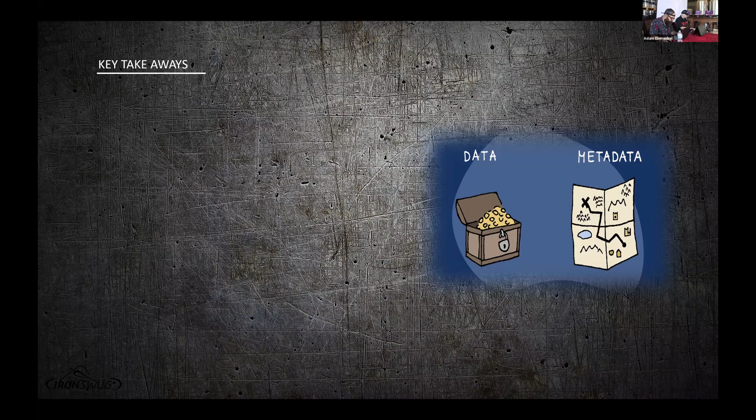But some key takeaways are just going to be streamlining your workflow, right? Automate those property inputs and reduce repetitive tasks and things like that. Also being able to standardize your data, ensure consistency across parts, assemblies, and drawings. Does anybody in here ever go looking for a part, and the part you're looking for, you eventually find it and it has nothing to do with the description you thought it should be? Yeah, that's a little troubleshooting sometimes, right, trying to figure that stuff out. So this is going to help with that. And also being able to work smarter and not harder - build it once, reuse it everywhere, be faster and cleaner and get better results.

And then if you look at this little picture here with the treasure chest and the map, you see the data versus metadata. Now keep that image in mind - on the next slide at the end of it, I'll elaborate on that just a little bit more. Let me back up real quick. There we go. Yeah, streamline your workflow, standardize your data, work smarter, not harder. There's that image - I'm just saying, keep a mental image up for just a second. In the next slide, we'll talk a little bit more about that data versus metadata, the treasure chest versus the map.

So what is metadata? Well, metadata is data that describes other data, right? A little bit of a circular reference there, but it basically tells you what the file is, who created it, and when they did it. So it can be used in a lot of different places - you can also have it used to organize, searching, automating workflows, and different things like that. It can be used in the bill of materials. It can be used for drawing title blocks. It can be used even within the PDM data cards. I'm not going too much into the PDM side of things, so I'm not going to talk a lot about that. I'm just going to stay within the SolidWorks realm of things here.

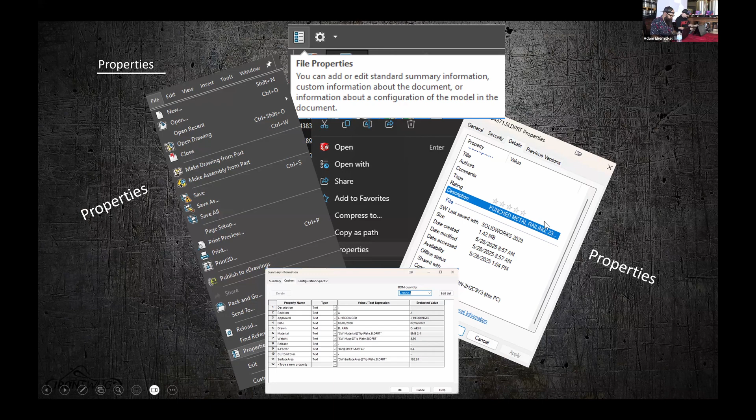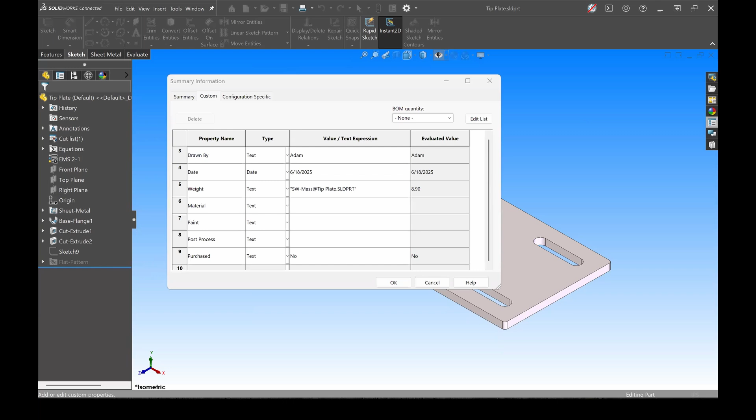Let's look at SolidWorks and just look at the properties. So we looked at it in the slide, but the one way you can get to the properties in the file, besides going to Windows Explorer, is you can hit File, come down to Properties, and here's your properties, right? Everybody, yes.

All right, so this is all this metadata in here, the file properties that live inside SolidWorks. I'm going to come down through here and actually clear this. I'm going to delete all these, just so you can see that they're clean, because we're going to come back and use this file again here in a second. So now you guys are all witness that this is clean. There's no data, nothing in there. So I'm going to go ahead and hit OK.

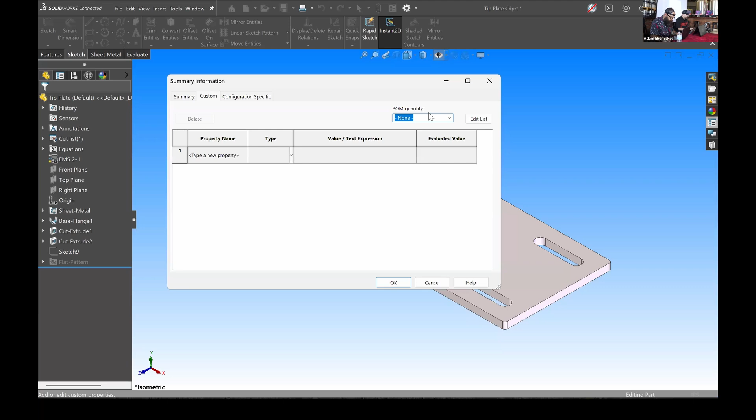And that's one way to get to it. The easiest way to get to those file properties is going to be at the top in the middle. And there they are again. We see them again, right? So we'll close that. That's important, really important. But let's jump back to SolidWorks, or to our PowerPoint again.

Jump down one slide. Wouldn't it be nice to know before you open? Does anybody in here open a SolidWorks file and sit there twiddling your thumbs for a few minutes, wondering if it's going to take a bit of time, and think I should probably go use the bathroom, call my buddy because I left my dog out, and then go grab a cup of coffee before I get back to my seat?

Be nice, right? So there's one tip.

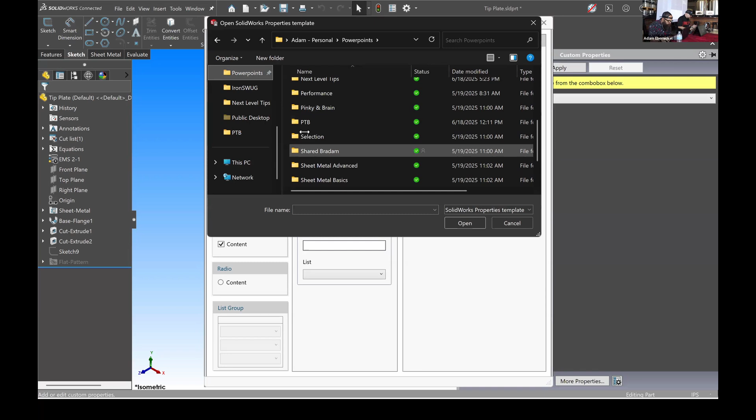This is one I just created for this presentation, just to show you what I did with it. I fleshed it out a little bit more.

I got part number, that's going to be your file name. I threw weight in here. We all need to know the weight of the drawing. Do we want somebody to have to go to the evaluate tab, get the mass every time and plug that in? I don't want to. Do you want to? So we could do that, and I selected that as a read-only option as well.

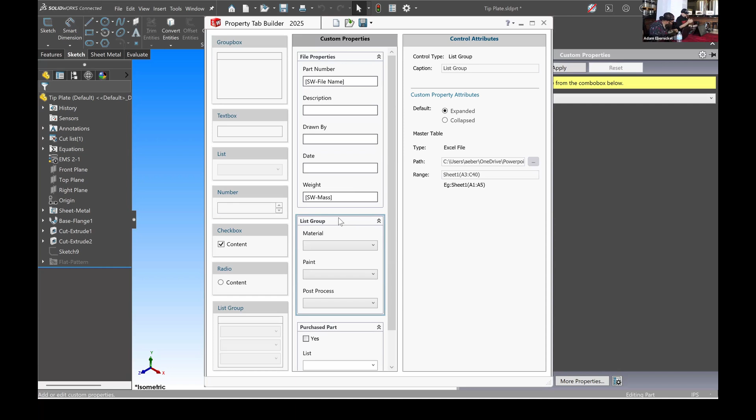I've got a list group here. I'm going to show you the Excel file that I put in there. But it's basically for material, so we can know what kind of material is there and what the process might be behind it. Also this last box, this is really cool.

Let's say you have this selection here, and I've got it listed as purchase part. The reason being is maybe we have this part that we created and we can't manufacture it. Well, if we can't manufacture it, we click the yes button. I have it defaulted for the value to come up, and they have to select yes for what to happen. It's defaulted as unchecked because most everything we're going to do, we're going to make in-house. But the minute they check that, it activates those extra options, right?

And you do that by setting up this. You say, okay, I named it purchase part. I want it to be defaulted unchecked. If they check yes, it's going to pull up this information, and the value is going to be yes and no. We come down, if yes is checked, then we have these different options.

Now I can delete this option and move it down to the no. So that way, if no is selected, that's what shows up. But I don't want that under no, I don't need anything under no. If no is selected, or is not checked, for example, then it's not going to do anything, it's just going to stay like it is. So I'm going to put that back in there.

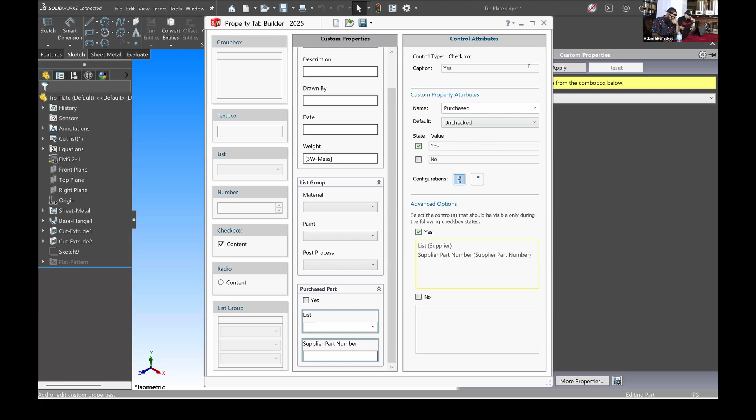I'm going to close that guy. I don't want to save it. Hello? Yes, I do want to.

Okay, alright, so we're looking at this part. We already verified, I'm going to pull this up real quick. We already verified nothing's in here. Here's the configuration specific stuff I was talking about.

I do want to mention this summary tab real quick. That's more of a file property tab, I guess you could say. When I go troubleshooting with people, this is one place I'll go.

SolidWorks does a lot of updates, a lot of feature enhancements, and they do it for our benefit because it's usually things that we're trying to get better or make work better for us. And throughout those times, sometimes the architecture of what's happening gets changed.

Give you a prime example, sheet metal in 2016 was a major architecture overhaul for SolidWorks, right? So every now and again, if I get a user that comes across with a sheet metal issue, the first thing I'll say is, okay, that looks a little funny, let's go check your graphics driver. That's going to be my first look. If the graphics driver is good, I'm going to say okay, let's go here and let's look, because we talked about this just in real quick passing a minute ago.

But I can see here on the summary tab that this was last saved on June 18th of 2025, and it was by me in SolidWorks 2025. But it was created Wednesday, February 5th, 2020, that's when the creation date was. So sometimes when I see an issue with the file, I'm seeing that it's old. I'm seeing files from 2009 that have been copied over for so long that architecture change has caused some issues with it. Sometimes you've got to go back and either redo some of those features or suppress and unsuppress them to wake SolidWorks up to this new version and say, okay, I'm alive again.

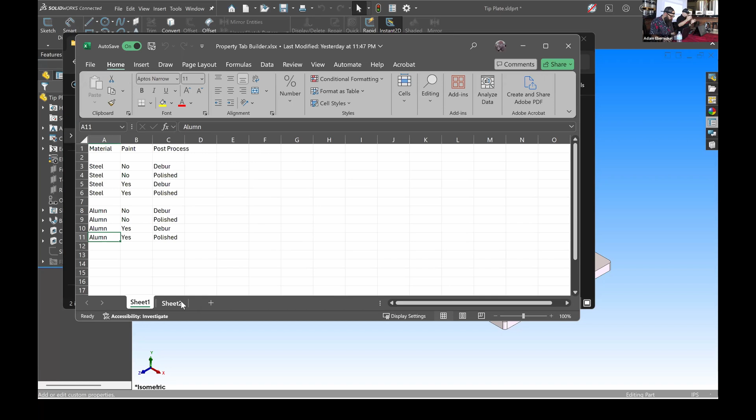And let's talk just a little bit through the spreadsheet. You can see how it's set up. You have to kind of think a few chess moves ahead, because you're trying to see, okay, what's my end goal here? I'm basically trying to illustrate the material, if it needs painted or not, and what that post process is going to look like.

If I had another process after that, I probably need to look at how many of those there are, because for each one of these processes, you're going to need an illustration of a material or whatever that first column is to be the same. Because it's going to say if you pick steel, it goes through all these different options. So if I pick steel, it eliminates aluminum options and it says, okay, now you have yes and no. Because they're the same, it sees them as the same. So then I'm picking yes and no, and then it defaults. So if I pick no, it's going to eliminate the yes stuff and just go to the post processes for no. And that's how it's going to work through.

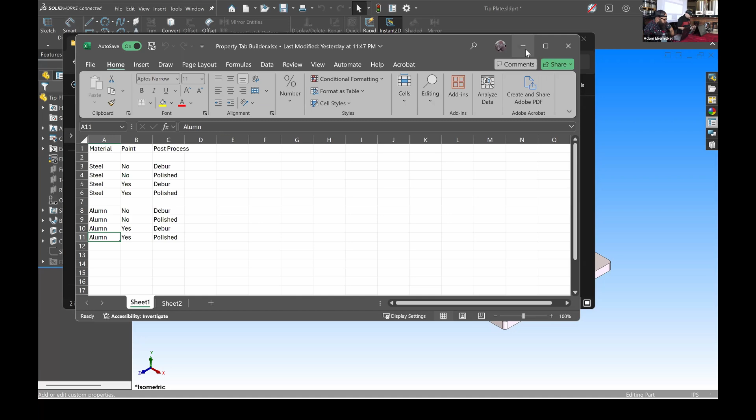We'll see that play out in a minute. I did a small preview of this for the Sinclair group. They enjoyed it as well. However, this broke on me and I didn't have time to troubleshoot it. I troubleshooted it within 5 minutes here before we started, and got it working again. I moved this data from one computer to another and the files didn't link up exactly right, but we got it good.

So we're going to minimize this down. Now we're going to look at how to use it. We're going to come in here, hit the drop down. This is the one we created. As soon as we create that and click it, it pulls that information.

So now I don't have to go into the properties. I don't have to fill the information out there. I've got the information here. We've got the part number. This is the one we said we wanted read only - we don't want them to mess with it. You look to the right, tip plate, because it's pulling the file name.

That's correct. Now we can add a description, so we'll say test. We can say drawn by AZE - we'll use my stuff for that. Should probably be using caps. Let's go down to date.

Now date, I can type that in manually if I really want to, but I don't really want to add extra mechanics to what I'm doing. So I'm just going to hit the drop down and say it's today. That's pretty nice and convenient. Then that weight that we were looking for, we don't want people typing that in either - it's living right here, so it's almost 9 pounds.

Then we can come in and select the material, whether it's steel or aluminum - we'll say steel. Then we can say if it's painted or not - we'll say no. And then we can say what process is going to happen after that - we'll say we're going to polish it. And then is it a purchase part or not? If it's a purchase part, we select yes.

And then we can go in and look at that list that we have from that. Who's it from? Do we only want to allow our people to use items from certain vendors? Well, here's your chance to do that. You can say only use stuff from Fastenal, TriMech, Go Engineer, Hawk Ridge, or McMaster-Carr. Those are who we want you to use, so don't use anybody outside of that. So we'll say that's McMaster-Carr.

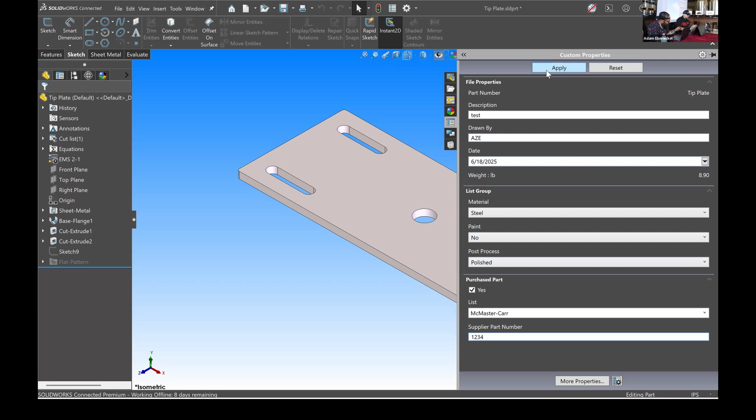Once that's done, we're going to hit apply. Once we hit apply, we can come back and we can look at that file properties again, and everything's in there - everything we wanted in there. And that's so much easier, right? So we'll close that. And that's not the end all be all. What do we do with that data now?

Well, let's make sure we're utilizing it in the right aspect and put it in our drawing.

Now, because I'm using a 3Dconnexion mouse, just a couple of cool things. If you don't know about mouse gestures, they live on your mouse, right mouse button, kind of hover, click around them. But 3Dconnexion also offers a radial menu, where you can click the button and have even more mouse gestures. That's pretty nice. You can set the buttons to do certain things. Like right now, I'm opening a print and I didn't click anything. Pretty nice, right? 3Dconnexion, go ahead.

Again, at the end, you'll have an option to win some of that stuff. But in here, at the bottom in the title block, I've emptied all this out, so there's nothing in here. Some people will still go in and fill that out manually with text. I advise not to do that because it's more room for error.

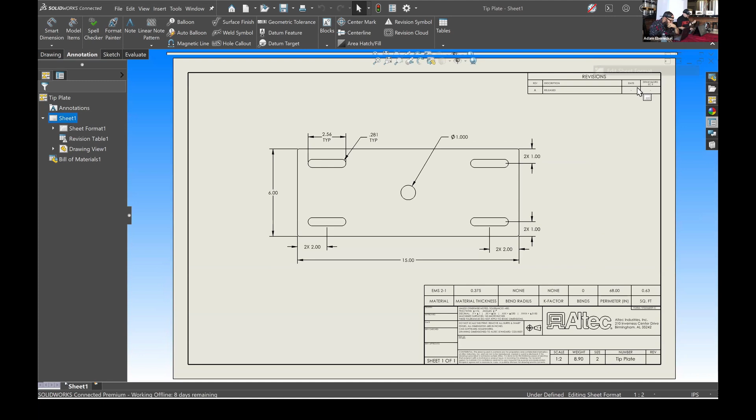But you can go in just like you do when you make your drawing templates and right-click, edit sheet. Come in here. Usually there will be a text box if you're using some out-of-the-box stuff. But if there's not, it's fine, you did your own thing. You can just hit note, grab a note, stick it there. Say enter, or don't say enter, just click off. There it goes, it's living there. I can drag that, put it where I want to.

So let's say I'm going to drag it. I'm going to do drawn, right? Drag it right down here into that title block. Then once I drag it, the title block is still selected, so I can come over here and do link properties. Linking properties has a couple of features in here.

Right now it's select a current document, so that means it's going to pull whatever file property metadata is from the drawing. Some people like to use that for maybe a check-by or any of those kinds of aspects, they might do that in the drawing. I like to do everything from the model myself because in the future, I feel like MBD is going to be a good thing because the model is master and you don't have to have drawings duplicating data that causes issues. Just a small brain thing of mine.

So that's for drawing, but you can click here and do model found here. If you do model found here, you've got two different options to select: drawing view specified in sheet properties. We'll talk about that and get a little more in detail with that in a second.

The next one's going to be selected component or other drawing views, so you can select maybe another drawing view or whatever. I like to live here, with the specified sheet properties, because I can go in and manage it a little bit better. I feel like it's easier to work with.

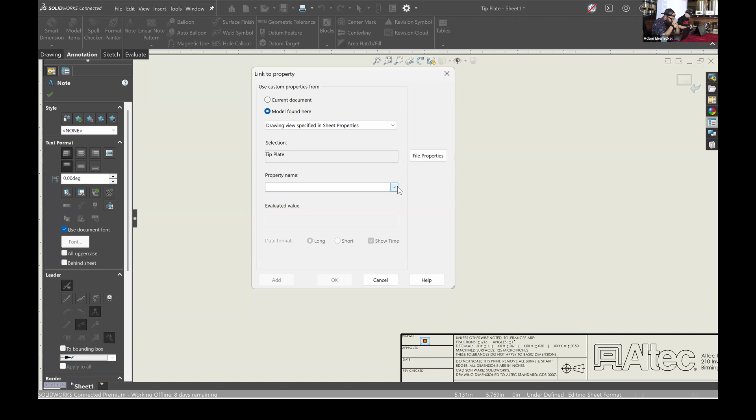Now we're going to go in and do drawn by, right? And we're going to say okay. And my name automatically appears. It's magic, right? So I did all that information over in the model, and now it can automatically populate in my print once I do this. And if you use print templates or drawing templates, you set this up in the background and it always works. You don't have to go in and do this anymore. It's just a little bit of pain up front to last forever and create a lot of good, repetitive, clean data.

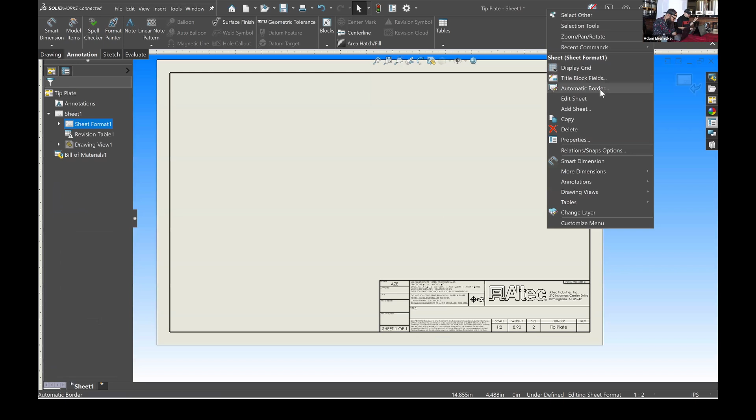Okay, so just out of curiosity, what happens to prove that we did that? Now, when we want to come out of this, we do have to right click and go back to edit sheet to come back to the sheet. But we see we're out of that, we're not modifying it anymore. If I go back, let's go here, go back to my part.

We'll go to file properties and change it from here. We'll look for my name, and instead of my initials, maybe I really meant that to be my full name or my first name, not my initials. So I'll change that to Adam.

Oh yeah, let's do Bradham. Bradham, I like that, let's go with Bradham. Good job, thank you, Brad.

There's Bradham, and we did that. We fixed it. Now let's go back to our drawing and see if it updated. Well, of course it did. It updated like magic, right? We didn't have to go back and fix it there.

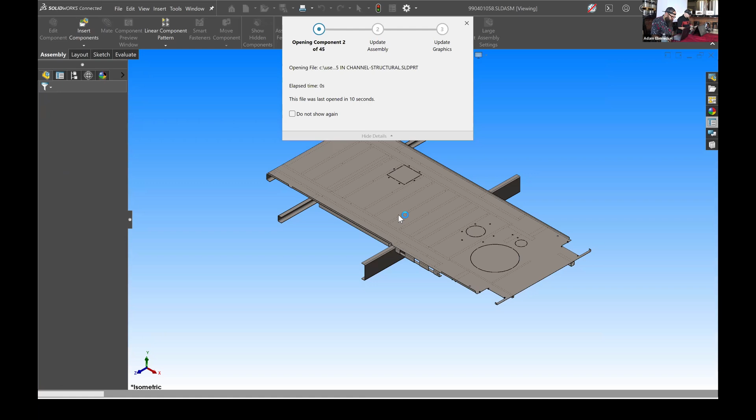It populates that metadata through all of our documents, so we're not worried about repetitive or redundant tasks. Once we get there, we're looking at this, but remember we talked about how to change those views or whatever we wanted to with the file properties. So let's grab another part real quick. Let's open this for just a second.

All right, so here's this other part. I'm gonna bring this into my file. Come over here. Nope, sorry. Here, there we go, this is right. Grab this. Well, let's refresh. It might crash on me. This happened earlier.

You blow it up, it's not a SOLIDWORKS presentation without at least one crash, right? It locks up right here. What it did is because I had this file open earlier, it was thinking that was still there. But for whatever reason it kind of locks up. Yeah, you broke it. Yeah, I broke it.

In the interest of saving time, I'm not going to go into that since that was the last thing I was going to show live. Basically, what you do is bring another file, you got a different view.

You're going to right click and go to your drawing properties. So right click, go to properties. At the bottom of that properties window is a drop down that will let you select default or whichever view you want. When you select that view and hit OK...

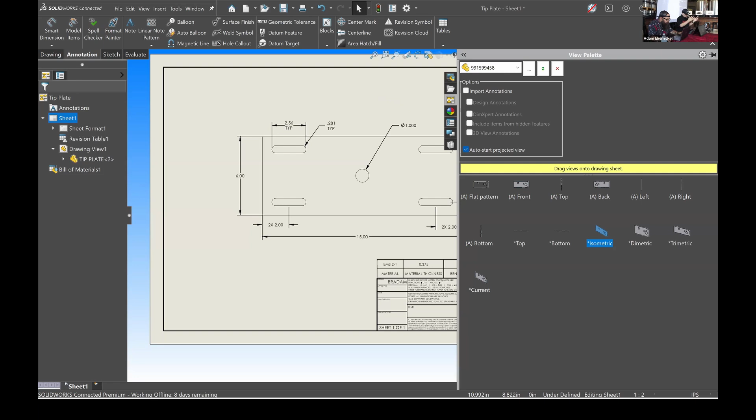Let's see if I can crash this real quick. It's going to change what's going into your link properties, right? Sorry I wasn't able to do that last one, but for sake of time we'll move on. That was the last thing I was going to illustrate live. Let's jump into our PowerPoint real quick.

One thing I like to do towards the end of my presentations is give out some notes, like if I was you and you were me giving the presentation, I was trying to write some stuff down, what would I have written down? One of those is that metadata is info. If I didn't know what metadata was, that's the first thing I'm writing down, that it's basically just information about whatever the file is.

Info before opening a part. It's nice to know that I can get that information before I even open it. And why that's so important, as I pointed out before, is because what if you got a part that's going to take 10 minutes to open, right? Not for the sake that I need to go use the bathroom, but for the sake of, do I really want to open it fully resolved? Do I want to open it lightweight, or do I want to open it in LDR? Hopefully people in here know what LDR is.

Large design review, it'll take a model that opens in 10 minutes down to about 30 seconds to a minute, right? It cuts out a lot of functionality. It's basically giving you a silhouette and not giving you any of that real data about the information in those files. It's just a pretty silhouette, that's all it is.

But then from that point, after you've opened it in 30 seconds to a minute, you can do a selective open. I like to use volume select for myself, to select a certain area, select the files that I want, and then do that selective open. It will render those and fully resolve just that information, saving me a 10-minute open down to maybe a 2-minute open for just a little bit of stuff I needed to modify.

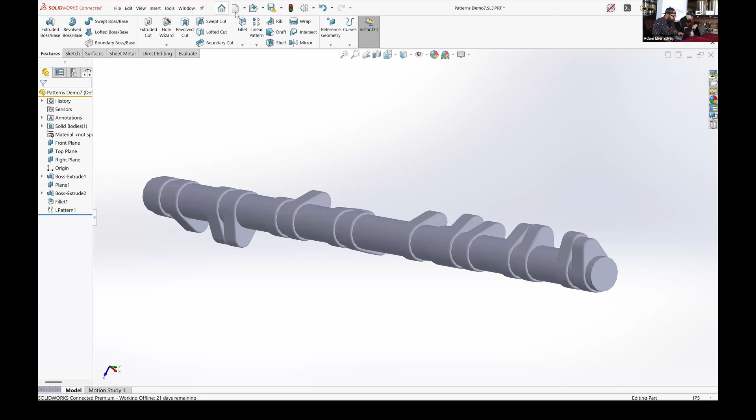So we'll start with a new part here, because all new parts start with a sketch. See, we're in kind of a front plane, it's kind of facing us. Auto flips to us in dimensions.

We'll go to our settings here, go into our sketches, and we'll show all the stuff I have set up here. We can turn them on and off. I'm going to use fully defined sketches, I'm going to turn that on, force myself to play nice.

How many people have ever heard the Toby Schnaars song, Fully Defined All the Time? Okay, there's not enough people that need to hear this. Do I need to play it for the next 5 minutes?

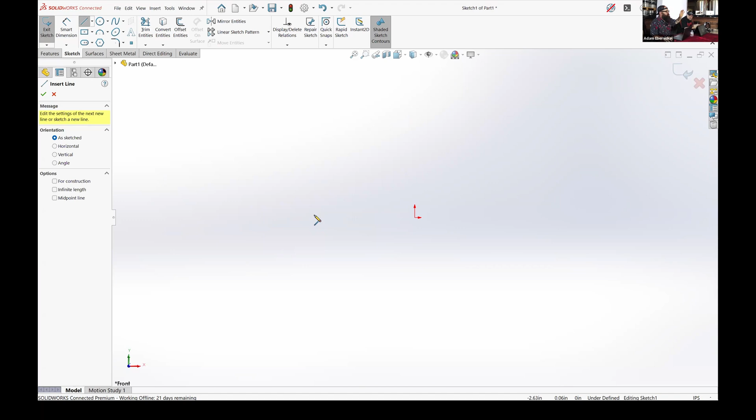I encourage you to go find that on YouTube and watch it because it's an earworm. It'll get stuck there, and then you'll be singing it in your office, and your coworkers will hate you.

So, alright, I've got my box here. I can come in and initiate a dimension if I'd like, but with the preview dimension sketch selection, I can click on the dimension that shows up, type in what I want, hit enter, escape, click on my next one. The dimension is previewed there, kind of shows you what you're trying to do.

But we're going to delete that one out. I'm going to try to exit out of the sketch. Another little tip: hit the D key, bring that exit sketch feature right to your mouse button, and now it won't let me get out of there because there's parts moving.

So if you have users who love to leave dimensions undefined or underdefined, force them into playing nice. If you're a CAD admin, force all your users into this. It'll drive them crazy for about a week until they learn to play nice. And then we can move on with actually creating the rest of our parts.

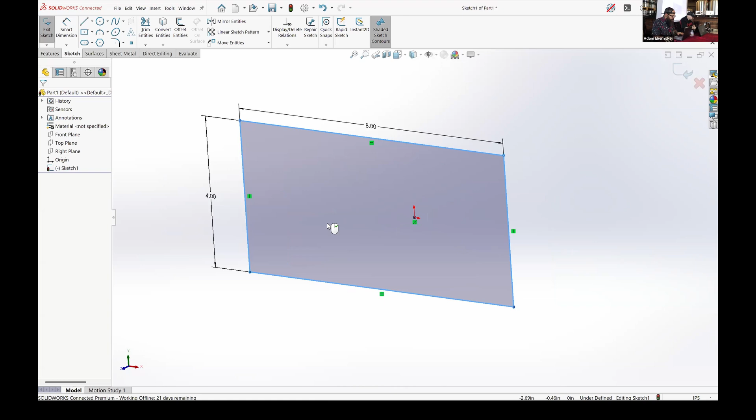I can actually move this around by selecting—if I undefine the centers here, I can grab inside that area and move all the dimensions around if I'd like, but we don't want that right now. So we're going to Control Z back, because Control Z is my favorite command ever.

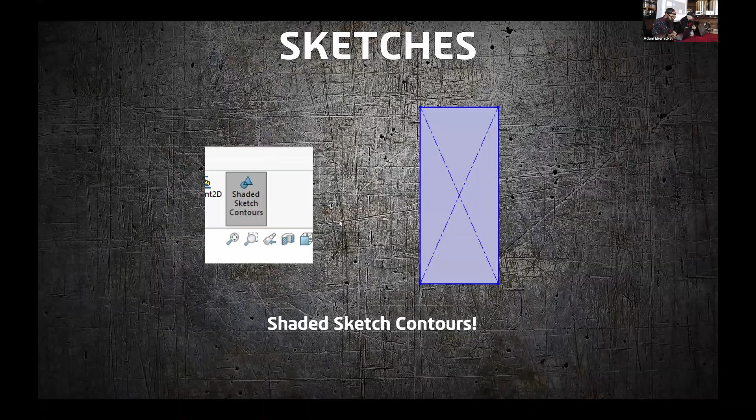Use the D key to bring that back, exit my sketch, jump back over. Alright, go to dynamic mirror and some dimensions here. So now I've got a plate. I want to do a cutout, but I want it symmetrical.

At Altec, we love doing parts symmetrical because you never know if somebody's going to bend it correctly or if it's going to be put on backwards or whatever.

But we're going to create a center line here, fully defined center line. I'm going to click on this center line, hit my S key. Another tip and trick: the S key brings up your shortcuts bar, which also has a function search in it. And I'm going to turn on my dynamic mirror.

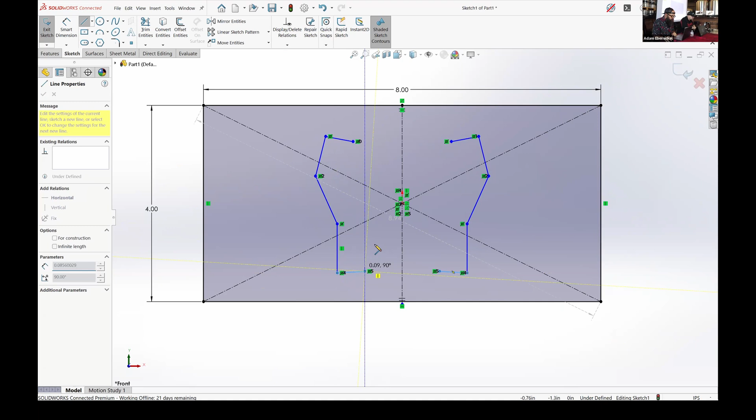Now, I'm not sure if you can see that very well on the screen, but there's a double line at the top and bottom, indicating that we have our dynamic mirror on. So now I can come in and start drawing my lines of the shape I want to create across my part, and it'll continually mirror those parts over. So as long as I keep that command on, it'll keep doing the mirror function, letting me continue modeling it symmetrically with only having to draw half.

Now there's a caveat: if I delete one, it doesn't delete the other—maybe a feature enhancement we'll try. If I hit our trim command and trim another thing out of it, it doesn't go back. So it only really works on sketch item creation. So if you know you're going to be working in symmetry, doing some revolves or whatever, you can do that.

We can work with the dynamic mirror. Now to take it off and get out of there, we go back into our S key again, go to our command search at the bottom, type in dynamic mirror, and I want to show where that's at. I can come over here and poke the eyeball.

It's going to pull up a bunch of things, show me where it is, and point to it with an arrow. If I want to go navigate to that, I don't necessarily want that—maybe I want to put it on my shortcut bar. With SOLIDWORKS 2024 and up, you have this little plus key there, and it adds it directly to there, so I can go back in and find it again without having to go search for it.

As you can see, the double lines are off. This is a sticky button, so we can turn that off. Well, now that I've got my stuff, we've got to fully define my sketch. So we're going to come in here and throw some dimensions in.

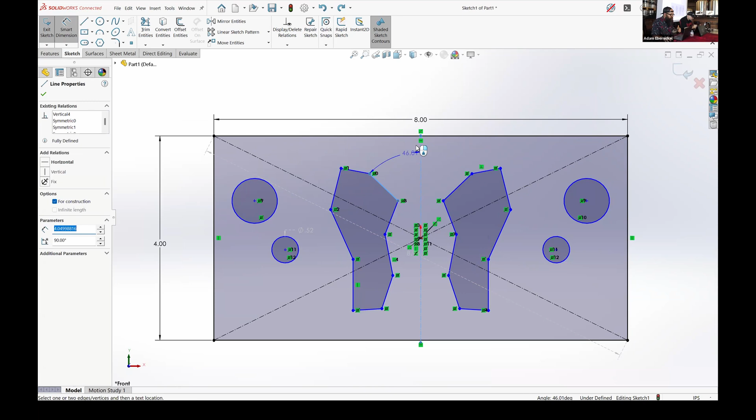You're not going to measure from the center line on this part. You're going to measure from edge to edge. So you pull it up, hit your shift key, drag it over the center, and now you've got a full dimension across both those pieces, both those lines.

We'll show it again real quick to show how easy it is. Hit your shift key, drag it over the center, and now you've got a full width dimension with only having to click over the center line. SOLIDWORKS is smart enough to infer that this center line is just there for reference, and I only want to dimension the actual hard entities.

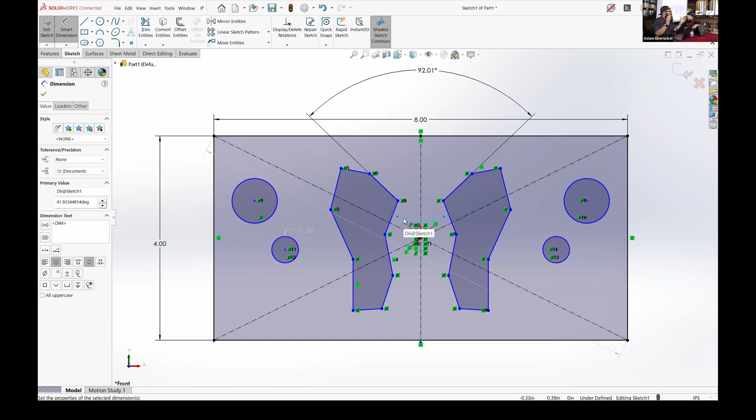I've got a user who loves to draw a bunch of lines and trim everything back out. One tip I like: notice how clicking makes it stick to the mouse. If I want to end it, I hit escape, or if I want to leave the line command on, I hold the left mouse button down while dragging my last line, let go, and it disconnects from the actual line chain.

We'll do that again, a single line. You hold the left mouse button down, and it'll allow you to do individual lines one at a time, rather than clicking and having the chain happen.

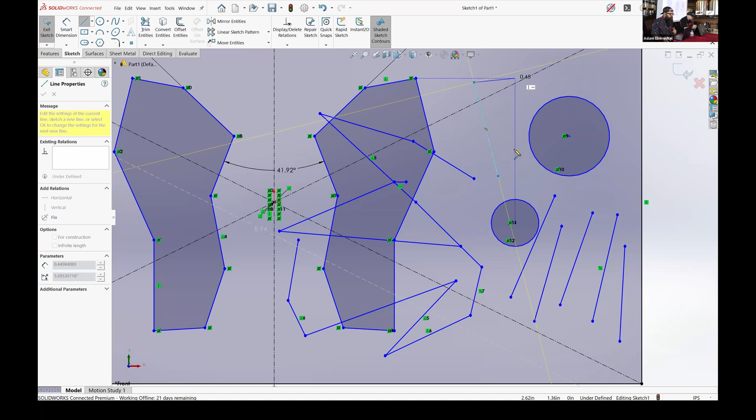Now that I've got all these lines in here, I need to figure out what to do with them. So we're going to initiate my trim command. I love power trim. It allows me to go through, click the left mouse button, draw my lines... oh, I went back over it. Let's go back over this line. There it goes.

This screen is too sensitive. I think it works a lot better when you're not on a 2K monitor. Pixels are a little... yes, it does.

But if you're doing power trim and you know you want to extend something, you can hit your shift key on that power trim, and now everything power trim becomes power extend. As He-Man says, I have the power, I now have the power to extend.

Now I can continue with that as well by clicking the line I want to extend. Say if this one here, I want to extend that line. I can click, hold the shift key, and just drag it straight out. It'll keep me from having the line move left to right, up and down. It will just extend it to wherever I want.

We'll do that again. Pretty simple: click your shift key and just drag out. We can click, drag out, and that gives you your shift power extend, and another snippet of extend there.

Because I have users who are terrible at modeling, I won't give them this hint, but I'll give it to you. If we have a bunch of swoopy stuff like splines, we'll go ahead and delete a bunch of this out of here.

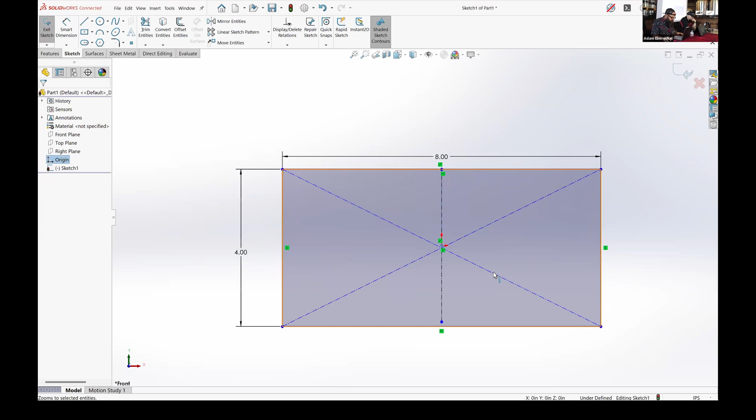All right, we're going to throw some splines in, but I'm going to do style splines because it actually helps me out. So I've got a spline here. Kind of hard to dimension that spline, but I can dimension the control points.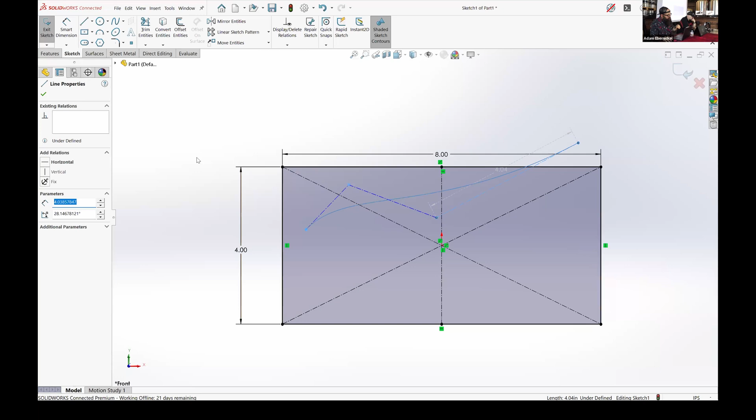Instead of taking the time to dimension the control points, I can right click and go to Fully Define Sketch. This is only if your users are already doing fully defined sketches. If you're not, this is kind of a dangerous tool. It'll auto dimension your parts and put the relations in for you. So a little bit dangerous if you're new at it, but just a tip to get you out of there quick.

Also, got some lines here. You want to go back over your line, and now you've got your arc from your line command without actually having to go and initiate an arc or a circle. You just go back over your start point and go from there.

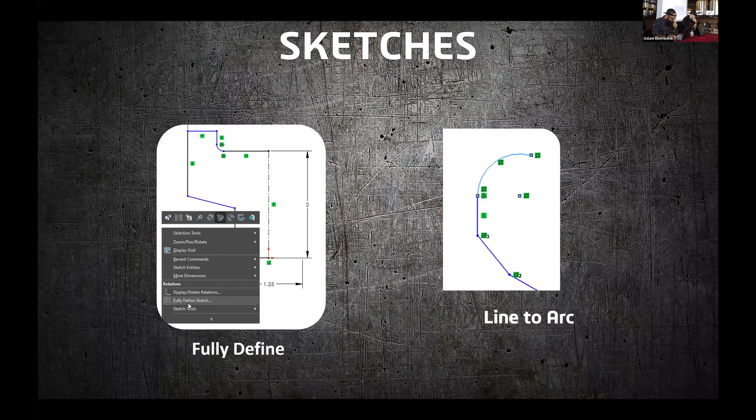We'll skip through here a little bit to give us some more time. Now that we've got our sketch tips and tricks out of the way, we'll go over to parts.

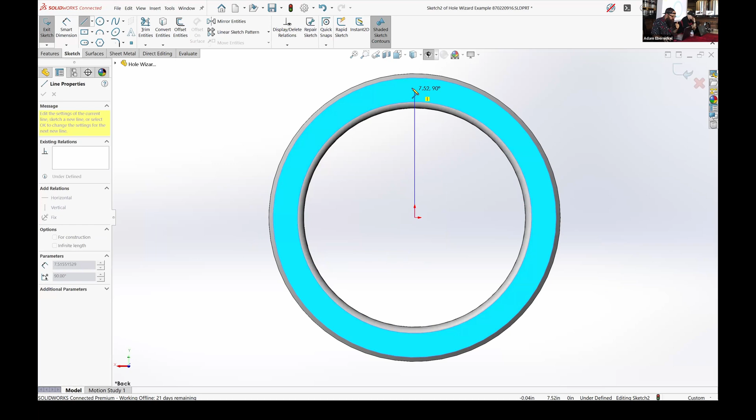A new feature in 2025 is using the hole wizard but basing it on a previously created sketch. So we'll open up here. We'll draw a sketch, delete this one out just to give us a fresh canvas, draw our sketch here, draw some radial lines because we want to make sure our holes are in the right spots, then dimension it.

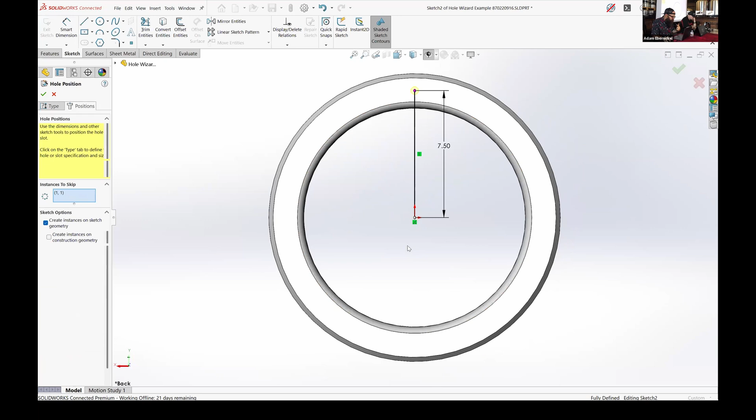And now we can initiate our hole wizard command with that sketch activated. It already picks automatically the endpoints of your sketch, but you can also go through and say, I don't want that one at the bottom. You can skip it. Finish your sketch, it's now absorbed into your feature.

Now, along that line, while we're in here, we'll go ahead and do our pattern, some pattern options here. Make sure we have some time for everybody to play on those machines. We'll initiate a circular pattern.

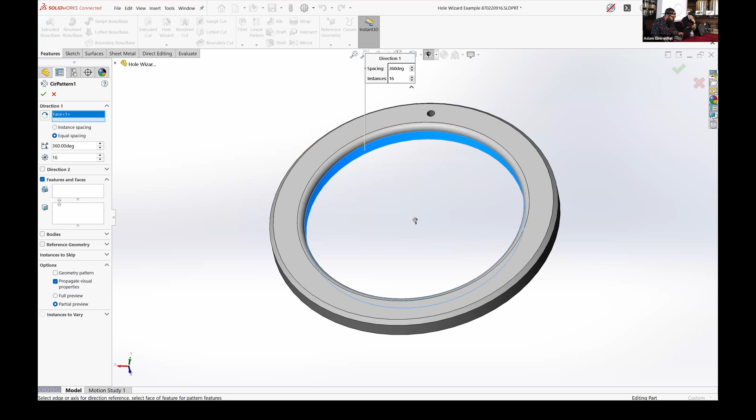Going to bolt this thing down. Got lots of holes in there, but I found that in the assembly, this hole specifically has an interference. There's something that's hovering over it. I can't put the bolt in the hole. Well, I can come in, edit my feature itself, go to instances to vary at the bottom.

There's a little key at the bottom you can put. Select the one you want to vary, modify the instance, and then change your dimension to, let's say, 70 degrees, and move that one, shift it either way to make sure that wherever you have this instance actually plays nice with your overall assembly. So we'll kind of throw it out there this way.

You can do this with assemblies as well as parts. So assembly features, linear patterns, allow instances to skip, instances to vary. We can go through that as well. I actually have a really good one here.

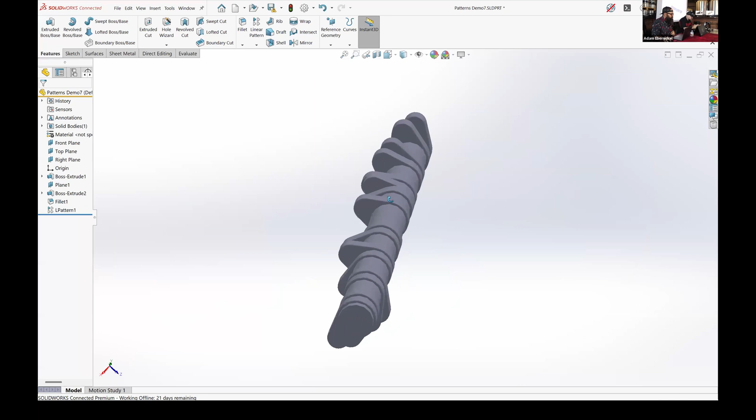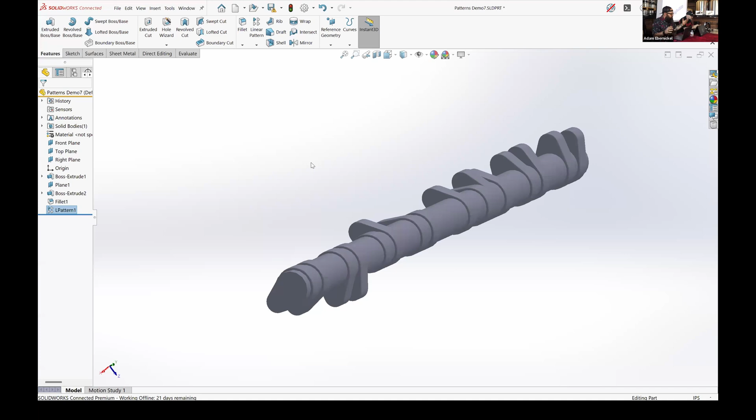Camshaft. I've actually made one pattern to make all the cam lobes, and they're all in different angles and different spacing. So instead of having multiple patterns to get the cam lobes in the right way, I've got my linear pattern with modified instances, modifying each of the lobes plus or minus a few degrees to make sure I get the lobes at the right separation angle. So when you're in there doing patterns, play around with the options. Make sure you get ahead of the curve and just try some new things inside your part patterns.

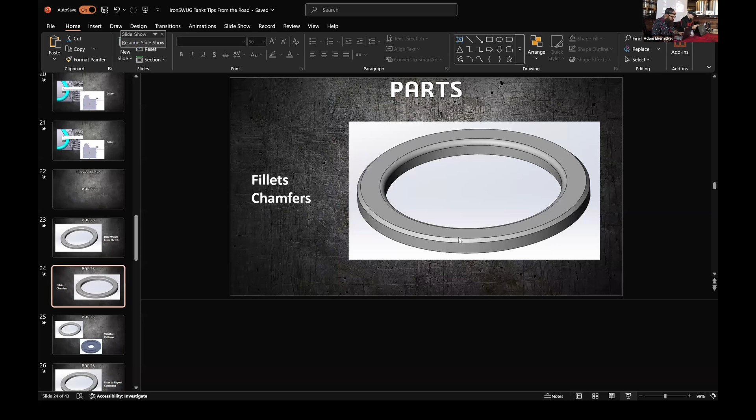All right, so we'll jump back into our chamfer example. Now, I'm making this part, this one doesn't have holes in it, but my machine shop says, I don't like this radius on here, I want a chamfer instead. The radius is just too hard to machine, or it's too time consuming to machine.

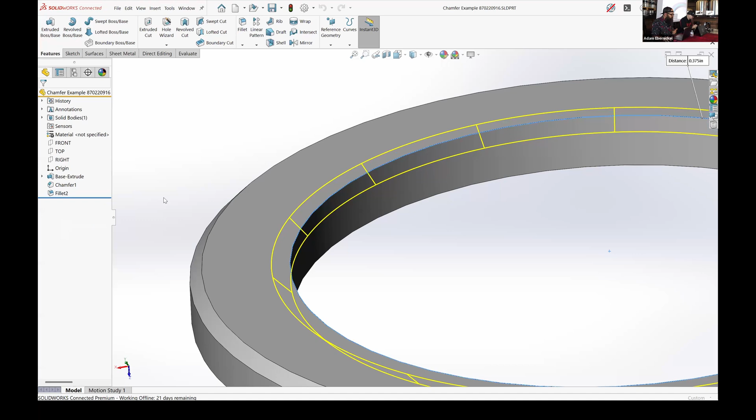We can right click on your fillet in your feature tree. You can convert that to a chamfer automatically. It'll convert the feature and the name directly back into a chamfer, but you can also convert it back to a fillet. Now, one caveat with this is you can't go from a standard chamfer back to a fillet currently. It's not an option. I wish it was.

But again, that's a future enhancement we can submit in for like the SOLIDWORKS top 10 every year. If you start with a chamfer, you can't go to a fillet, but if you start with a fillet, you can go to a chamfer and back. Little Easter egg, but a little thing you can do to make yourself more efficient in modeling and modifying your parts.

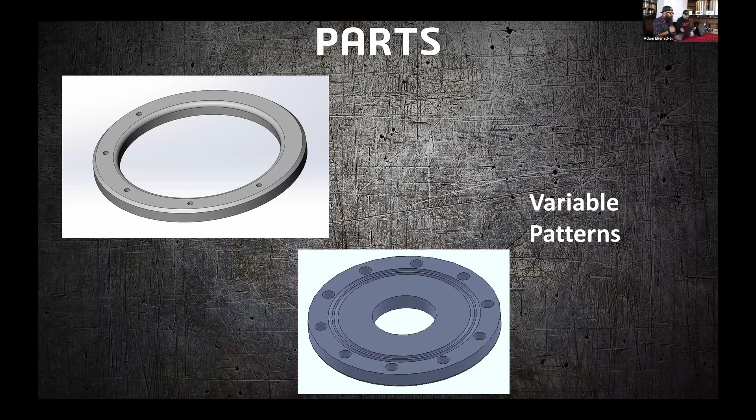All right, I've got a question from Vic. He says, could you then add those cam lobe instance dimensions to a design table to make it easier to modify? Ooh, I'm not sure. So those varied instances, I don't know if our guy knows, but the varied instances of the cam lobe, can you add those to a design table, do you know? I'm not sure you can do that because all it does is individually move things around. I wish that'd be something we could do. That would be cool if you could. That would be something interesting to try later.

I've already touched on some variable patterns here, so we'll kind of skip through to make sure. Enter to repeat last command. Pretty common to continually have to repeat commands over and over again, so if you do, use the enter key.

So we'll jump into some assemblies here, and we will pull up one of our nifty trucks here. It should be open already. There we go. This is one of our AT48 units. You might see these out here working, or if you went to SolidWorks World, or if you went to 3D Experience World, we actually had this specific model on the floor.

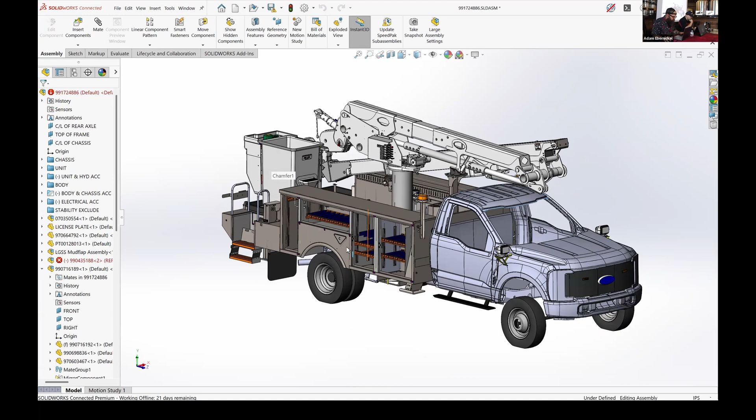But if you hold tab down and hover over things, it'll start hiding parts. We'll zoom in a little bit so we get some more granularity here. But if you shift tab, it'll bring it back from back to front, so you can bring back what you need. We'll go ahead and hide those back again. But control shift tab...

Oh, it's not working. Let's see... there it goes. Nope, there. Maybe it's control shift tab. There we go.

You hit control shift tab and it shows it back up, well, it's not working on this model. So let's take it down. Yep, it's a lot of information. But shift tab will show things from back to front, and control shift tab will show everything that you've hidden in a light blue color, so you can click them all and bring them back in.

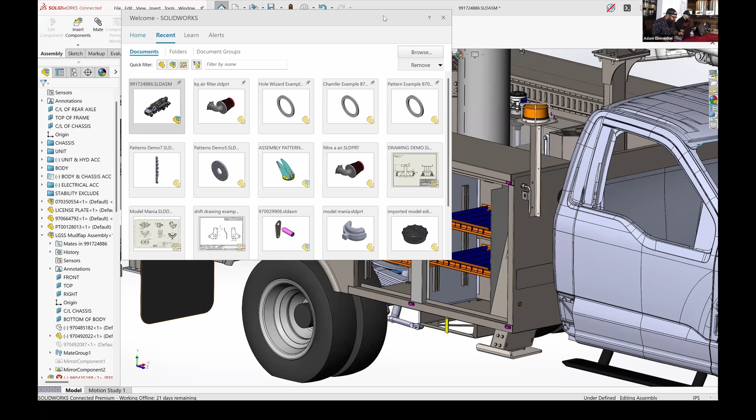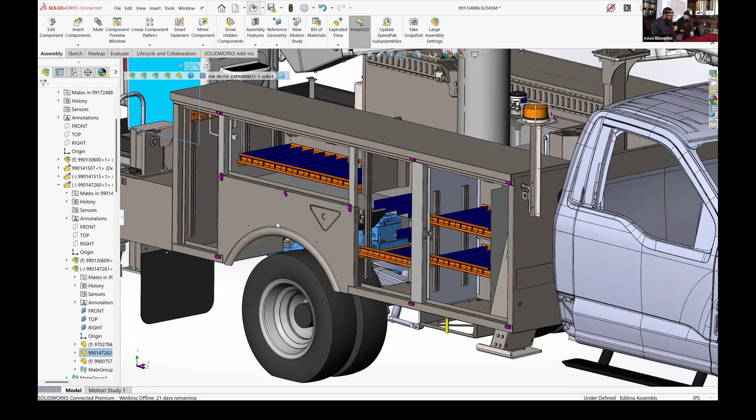Let's see if I can bring one up real quick, that'll actually showcase that. Wish this zoom thing would stop showing up here. There we go, we'll open up another one real quick. It's a little bit better of an example, just so I want to make sure everybody can see that. I hate when my demos don't work, and I'm going to make it work.

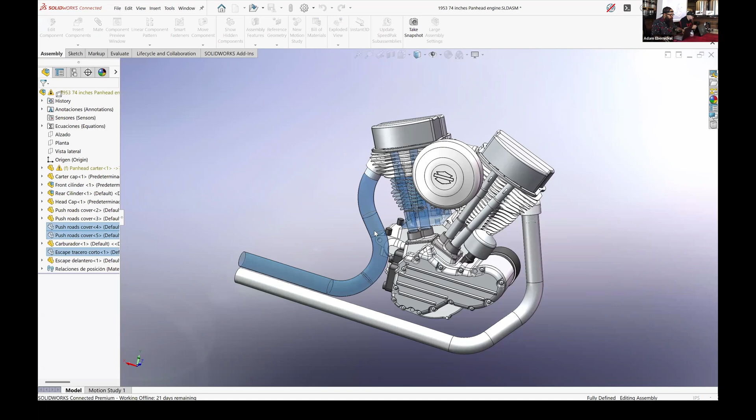So we'll do our tab, hide the parts we want to hide. Shift tab, we'll bring them back. Hide them again. Control shift tab will bring them back in the blue transparent color, and you can pick the ones you want to showcase back. So just an example to go along with that.

Now, assembly visualization and performance evaluation is one of my go-tos when I'm working on parts. If I come across a model that's a pain, it's slow, it's clunky, it's giving me problems opening, the first thing I do is come into my performance evaluation and figure out what's my problem. Which one of my files inside this assembly is giving me problems?

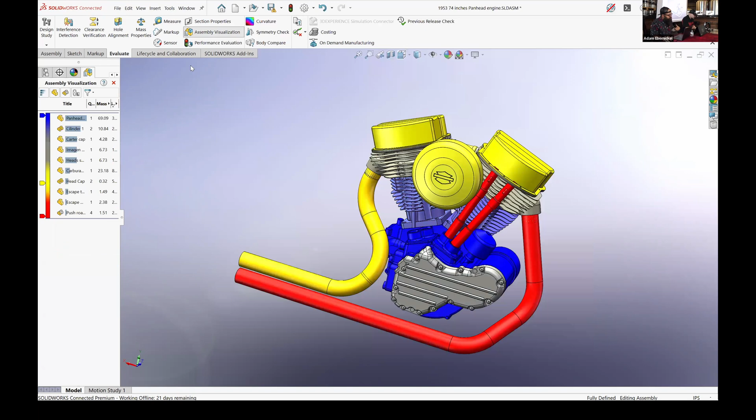Looks like this cylinder number 1 here at the top has a lot of graphics triangles. It could be slowing me down. It could be that this Carter carburetor, which has the larger open time, could be giving me a problem. Or I can pull this up and use my assembly visualization tools, go to performance, and then sort by my total graphics triangles and find which of my parts are overly complicated, giving my computer the issue or causing it to slow down for having to calculate too much.

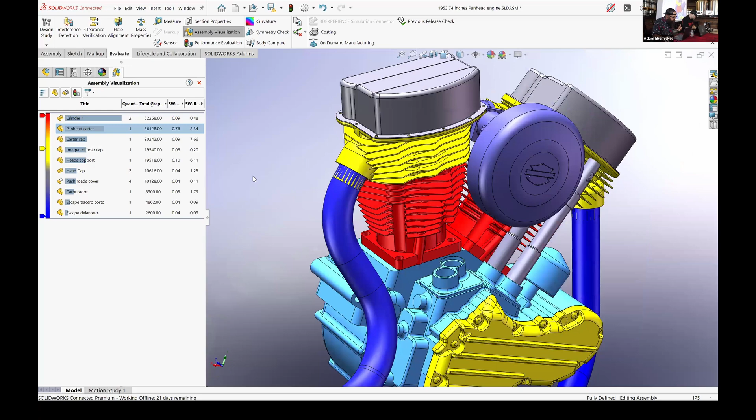So we know that cylinder 1 and this Carter carb are overdefined. Actually, this is the bottom half, I'm not sure, I'm guessing it is a French translation. But assembly visualization and performance evaluation are two main go-tos when I start troubleshooting new components or new assemblies that have been given to me by other people, especially these body guys.

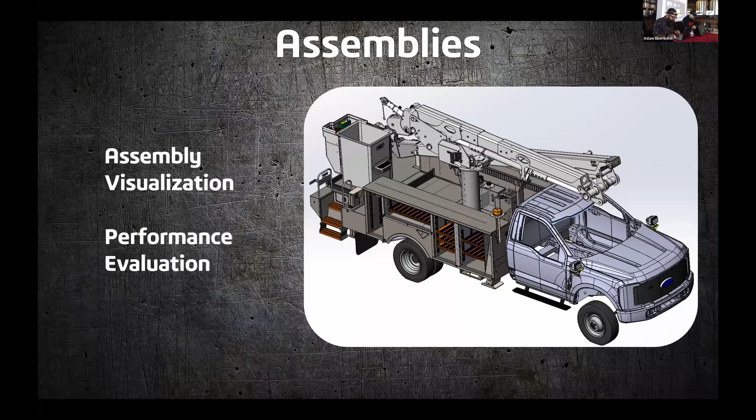All right, we've already touched on pattern options, we'll go back in here. All right, who knows about the R key? Bring your recent parts back in. Okay, the R key will allow you to bring all the recent parts that you have here.

You can even pin them to the top, so if you know you're going to be using something over and over again, you can pin it to the top. But for this one, I want to drag this one in. I can come in and actually drag these parts directly in from your R key, so you can pull them in over and over again, find the ones you want. So I want to replace that air filter with this K&N.

Pull directly from there. Prasad on Zoom says he learned about assembly visualization at World this year. Yep, it changed the way that he works with assembly. Yes, assembly visualization can change the way you work with assemblies.

All right, another one I like to show, I didn't get to show it this morning, was copy with mates. Let's pull up the truck here.

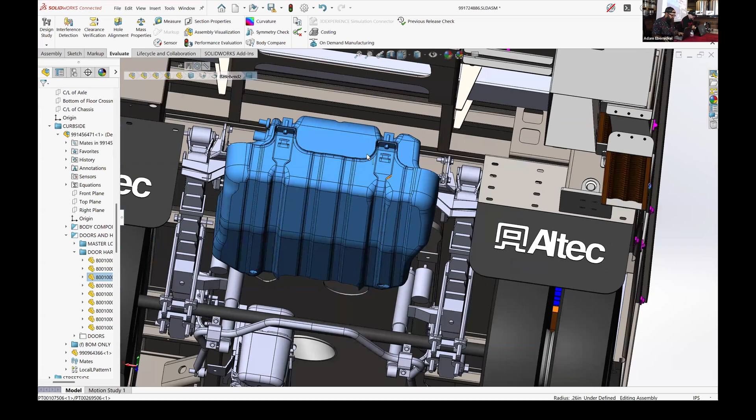See if I got something that has some... you don't have any hardware in this, Adam? No, we don't model hardware. Not unless it's a weld nut, they got to weld it in place. All right, we'll do this. We'll just do this eyelet here, and we'll copy that one. We'll delete that one out.

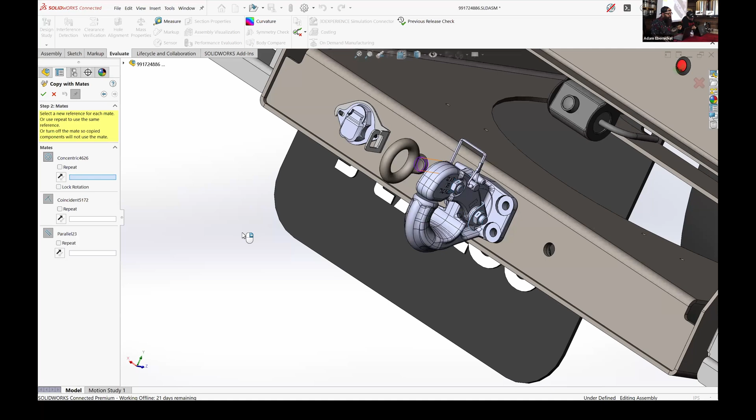All right, so copy with mates. You select the part you would like, right click, copy with mates. You click your little arrow here, and notice that it's going to pull up all the mates that actually hold that part into place and allow you to pre-select the next instance of those mates. So now I know I've got a part there. We're going to get a coincident mate here, and then a parallel face. We'll use the edge here, and we can continue inserting parts over and over again.

And it allows us to put them in with the mates already attached. So instead of having to insert your part, initiate the mate command, and mate the part, you can just copy the one you have and copy the mates over as well.

Another feature that came out in 2024 was auto repair mates. You right click on your mate folder or your mate that you have issues with, and you find the auto repair feature at the top. If it can find a solution, it'll find the solution. It says this one right here, 3 of these mates were corrected. It does this by finding a face where an old face used to be. If it can't, it gives you a warning. It says, hey, not all of them were done. Please go back and try to manually do it.

All right, let's jump in. Now we've got our parts and our assemblies done. Let's go over to some drawings here. Flag notes are a real big tool for Altec.

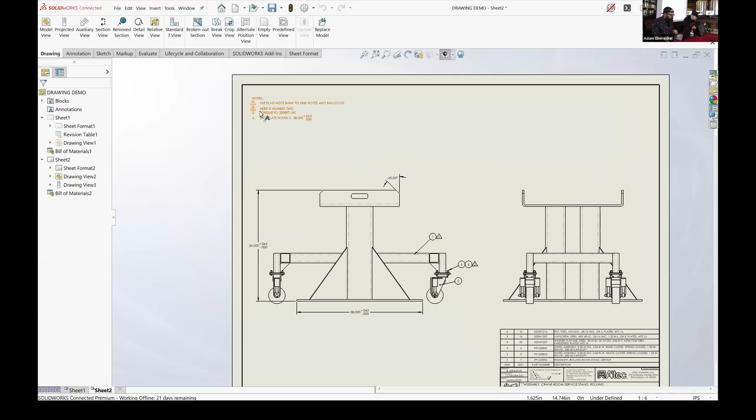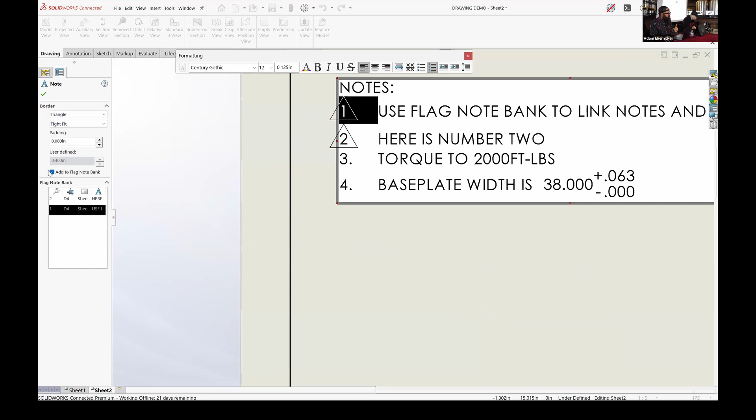Flag notes allow us as users to tell our machine shop, hey, this note is important. So we have a triangle here on our number. We right click, double click on the triangle and say I would like to add it as a flag note bank. Now I can come down, right click on my balloon that I want to add the flag note to, add it to stack, pick the balloon I would like, and link it down there to it. It allows you to even showcase and show what that note says in your feature itself. So if you're modeling something, you get a big part and you want to see what that note is, you just hover over it and it'll tell you what that note means.

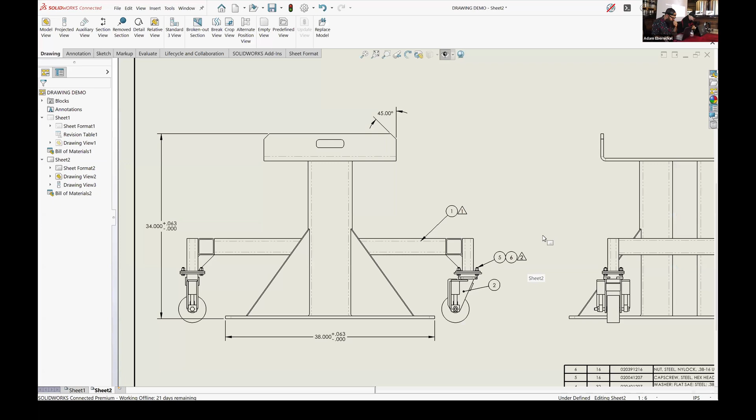One of my earlier presentations was on the shift button, but if you have stacked balloons or you want to stack some balloons, you hold shift, you can unstack them, or you can restack them using the shift key.

If you have dimensions that you want to move between views, hold the shift key and move your dimension between your views. So if you have a dimension you like, it's in a really cluttered view, you've already got it set, we can move it between them.

You can also do things like copy -- you can do a format painter on this as well. Select your dimension you want to format from and paint it to the other one. So if you know you've got a dimension scheme or a tolerance scheme you want to copy, you can copy and paste it around your print easily that way.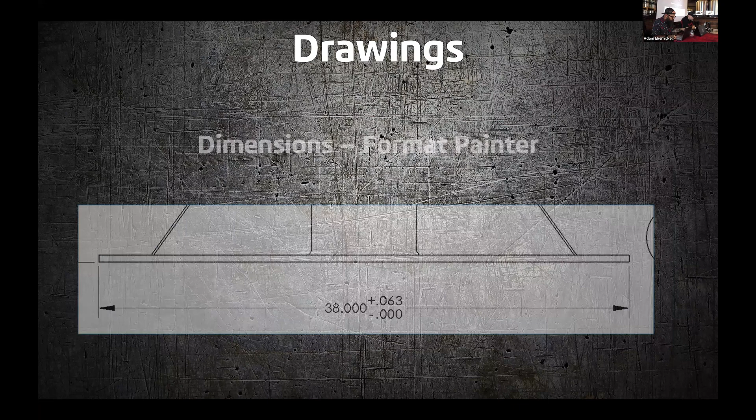And then, dimension auto align if you would like to do that. Some people do, some people don't.

But my biggest tip for any user across any skill level is use SOLIDWORKS RX. It is in all of your installs. This will allow you to check your diagnostics, record any problems that you're seeing, and it'll also allow you to keep up on some of the system maintenance. It also has a reliability tab, which will show if you've closed SOLIDWORKS out or if it's crashed, and it'll show you over a 30-day time span or whatever day you would like.

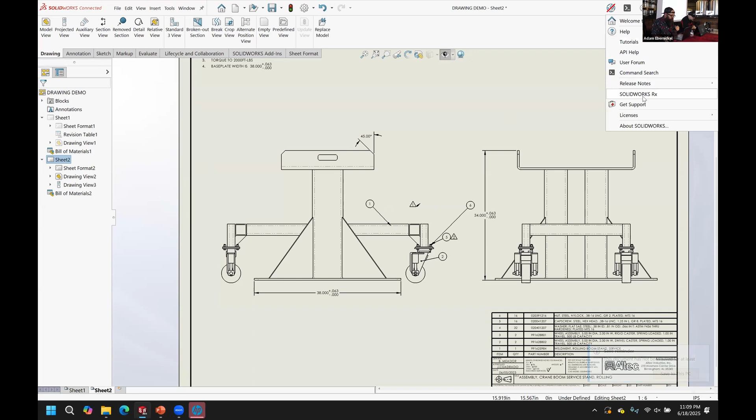So use your SOLIDWORKS RX, go in and do some diagnostics. We'll take a second here and go over that since I have a little bit of time left. SOLIDWORKS RX is at the top with the question mark.

Here's my reliability. Let's hover over that button there -- looks like it ended by task manager, so I crashed it manually on that day. On this day, it looks like it closed normally. On this day, it looks like this one ended by task manager or event, so it crashed.

So if you're having problems with your machine or your install, you can actually reach out to your CAD admin, show them this reliability, and say I'm having a lot of problems, please help me. You can use this as a good starting point to troubleshooting your problem.